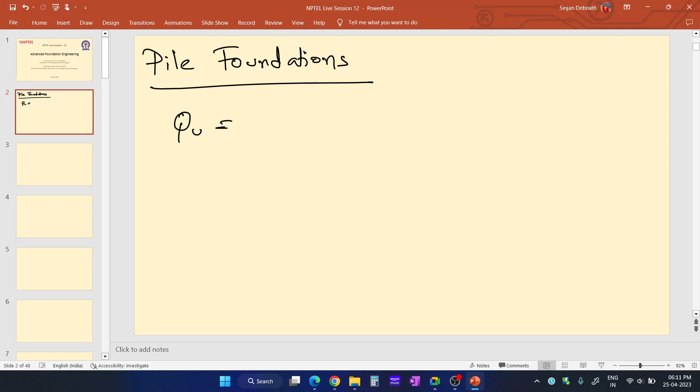So pile foundations, the ultimate bearing capacity of pile foundations, QU, is the ultimate load carrying capacity of a pile foundation. It has two parts: one is tip resistance, and another one is frictional resistance. So QU is the total tip resistance, QP, plus QF. QP is the total tip resistance or end bearing resistance.

And this one is the total frictional resistance. So actually what happens is that a pile foundation derives its load carrying capacity from these two parts.

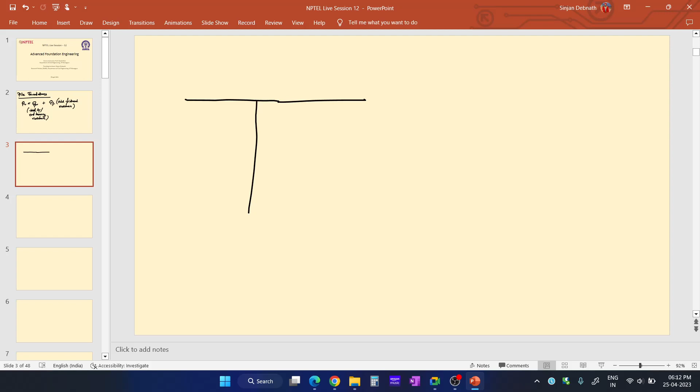So actually it is like this: suppose this is your ground surface, and you have constructed a pile foundation over here, and suppose you have a firm strata over here. Suppose this is your not so dense soil, weak soil, and here it is firm soil.

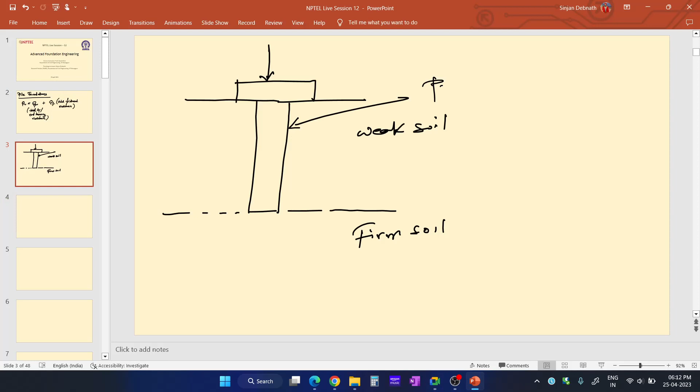Suppose here is the pile cap on top of the pile, and you are applying load on top of the pile cap, carrying superstructural load. So suppose this is the pile, this is the pile cap, and the superstructural load is acting on top of it. How will it distribute the load? First, there will be skin friction along the length of the pile, and also end bearing resistance, exactly as I mentioned earlier.

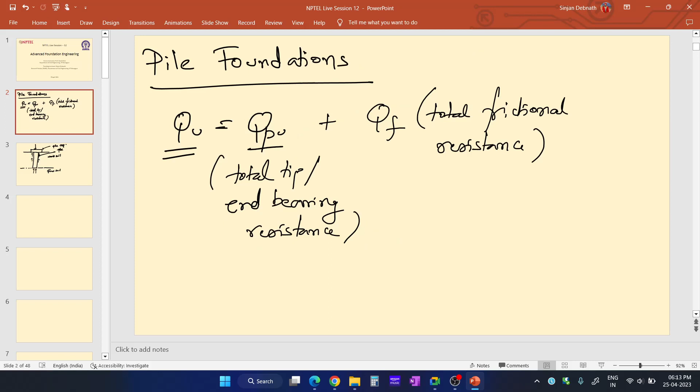The ultimate load carrying capacity of a pile has two parts: total tip resistance and frictional resistance. Suppose you apply load Q, and the load is carried in two parts: one is frictional resistance, QF, which acts along the length of the pile. The other is end bearing resistance, QPU, which is provided by the firm soil below the weak soil.

Now suppose this firm soil is at a greater depth, and the superstructural load Q is only carried by the QF part, the frictional part—meaning only QF dominates. Since the firm strata is at a very large depth, constructing a very long pile would be uneconomical. Instead, if we construct a pile of substantial length, it will provide enough skin friction to carry the total structural load. When QF is the dominant one, this type of pile is known as a frictional pile or floating pile.

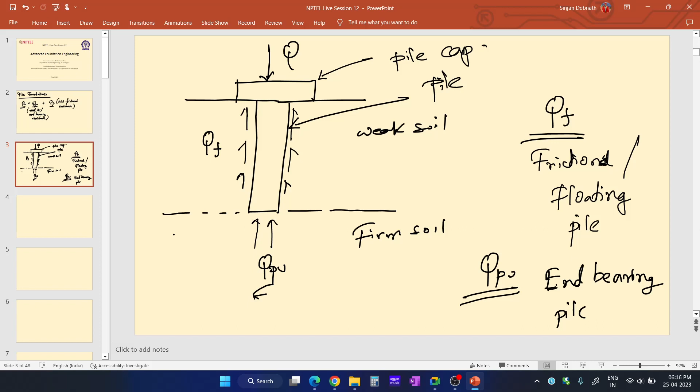Now let me write down the equations we will use. The ultimate load carrying capacity of a pile is defined by two parts: first, QPU, the total tip resistance, and second, the total skin friction resistance, QF. These can be written as QPU = qpu × AB and QF = fs × AS.

So QPU is the unit tip resistance, or unit end bearing resistance.

This capital QPU is equal to small qpu into AB, where AB is the cross sectional area of the base of the pile, particularly important when the pile is tapered—where the top diameter and base diameter differ. In such cases we take the area of cross section of the base. Otherwise, if the diameter is uniform throughout the length of the pile, we can take the cross sectional area at any depth.

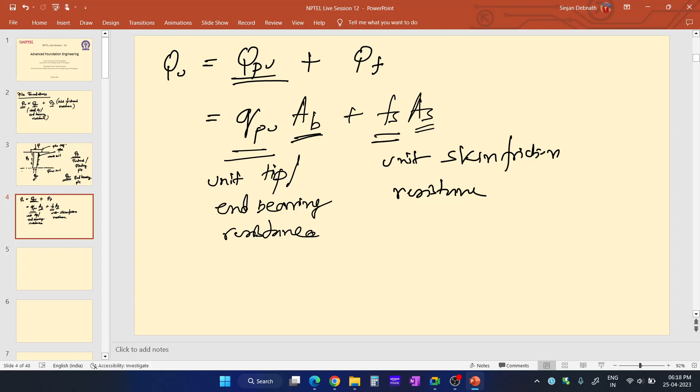Now, one thing I would like to mention before going into the equations. We know the ultimate bearing capacity for shallow foundation, the Terzaghi equation. Let me write it down once again.

See, this one is tip resistance. Look at this portion, it will provide the base of the pile. The tip of the pile is resting on top of the firm soil, and it is providing end bearing resistance. It is more or less similar to that of shallow foundations.

So what is the basic bearing capacity equation for shallow foundation? QPU for shallow foundation is C*NC plus sigma dash*NQ plus 0.5*gamma*B*N gamma. This is the ultimate bearing capacity equation for shallow foundation.

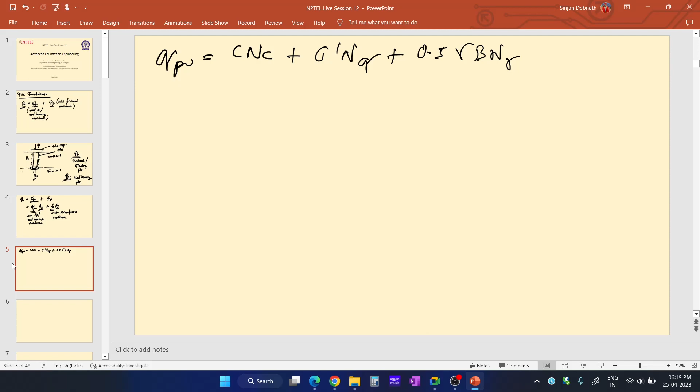So these two parts are much greater than this part, so this part can be easily ignored. So QPU can be written like this: C*NC plus sigma dash*NQ.

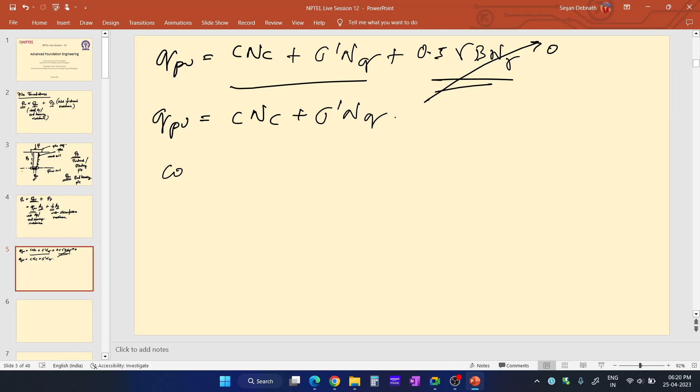Now if the soil is cohesive soil, if you remember the previous lectures, in case of cohesive soil this part becomes zero because N gamma is zero. Only this part remains. So that means for cohesive soil, QPU is C*NC.

And in case of cohesionless soil, this C becomes zero, only this part remains. So in that case, for cohesionless soil, we can write QPU is equal to sigma dash*NQ.

What is sigma dash? This sigma dash is the effective overburden pressure. And what is C? C is the cohesion. NC and NQ are the bearing capacity factors. So these are the two equations. And also I'd like to mention one thing, these two are QP.

And what about FS? So we have determined this QPU for cohesive soil and cohesionless soil. And one thing also to mention, for cohesive soil this C, this NC is taken as 9, the bearing capacity factor. It is generally 9*CP.

It is denoted, this C is denoted as CP, and the cohesion part, and NC is equal to 9.

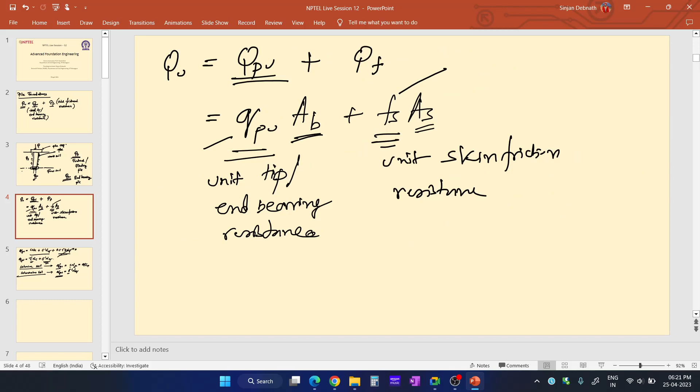So FS, for cohesive soil, this FS is equal to alpha into C dash. What is alpha? Alpha is the adhesion factor. And what is C dash? C dash is the cohesion along the length of the pile.

Suppose you have a pile like this, and this is your firm strata. In that case, C dash is the cohesion of this soil layer, and Cp is the cohesion of this part of the firm strata, along the length of the pile.

So for cohesive soil, this Fs, that is the unit skin friction resistance, it is alpha into C dash, where alpha is the adhesion factor and C dash is the cohesion of this layer along the length of the pile. Now, for cohesionless soil,

this Fs becomes K into sigma AV dash tan of delta. So what is K? K is the lateral earth pressure coefficient. And what is sigma dash AV? It is the average effective overburden pressure. And tan delta, what is delta? Delta is the wall friction between the pile material and the soil.

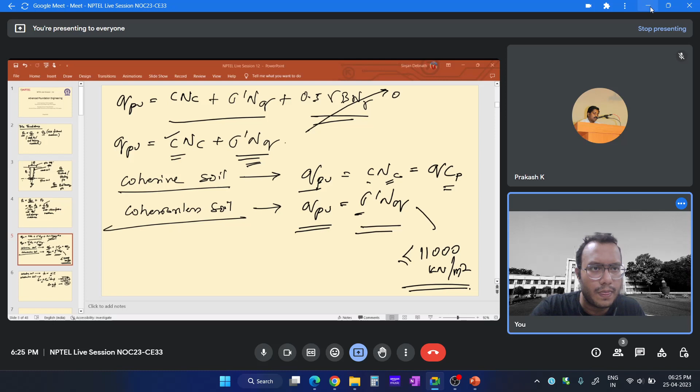I hope you have all understood these things, these are all basic things. So now I'm going to proceed to the problems.

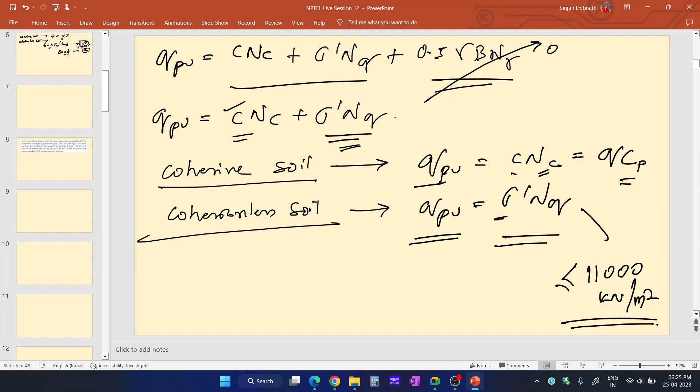Let's go to the first problem. Let me read out the problem once: a 15-meter long, 300 diameter pile is driven in a uniform deposit of sand. Phi is equal to 40 degree.

The water table is at a depth of 2 meter below the ground level. The unit weight of sand above and below the water table is 18 and 20 kilonewton per meter cube respectively. Using k equal to 2 and delta equal to 3/4 of phi, NQ is given as 135. Find out the ultimate load carrying capacity of the pile considering the critical depth concept. Take LC equal to 20D for dense sand.

So what is critical depth? Till critical depth, it is considered while calculating the ultimate skin friction resistance, the total skin friction resistance. It is considered that the overburden pressure, used to calculate the skin friction, increases linearly up to the critical depth, suppose up to 20D from the ground surface. But beyond that it remains constant. You will understand it once again as I solve this problem.

I have already explained these things in previous sessions, but let me say it once again. It is mentioned that LC is equal to 20D, that is the critical depth. So from the ground surface up to 20D depth, the overburden pressure will increase linearly. After that it will remain constant. This is only required for calculating the skin friction resistance. You'll understand as I solve this problem.

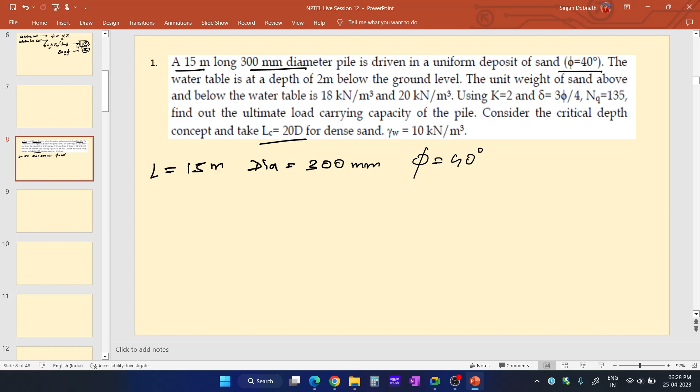Let me write down all the information given. The length of the pile is 15 meter, and the diameter of the pile is 300 millimeter. It is driven in a uniform deposit of sand, phi is equal to 40 degree. The water table is at a depth of 2 meter below the ground level. Suppose this is the ground level and this is the pile, like a vertical pipe, 15 meters long.

The diameter is 300 millimeter, and phi is 40 degree. The water table is at a depth of 2 meter below the ground level. The unit weight of sand above and below the groundwater table is 18 and 20. So here gamma is 18 kilonewton per meter cube above, and below the water table gamma sat is 20 kilonewton per meter cube.

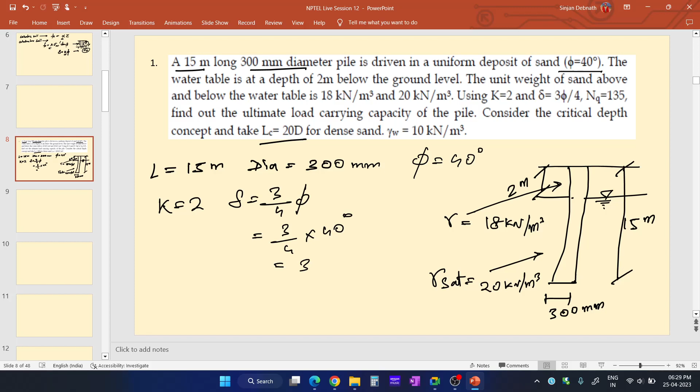K is equal to 2, that is the earth pressure coefficient, and delta is equal to 3/4 of phi, so 3/4 of 40 degree, that means 30 degrees. NQ is given as 135. LC is given as 20D, so 20 into 0.3, which comes out to be 6 meter.

Okay, so this is all the things that are given over here. And gamma W, that is the unit weight of water, is 10 kilonewton per meter cube. Okay, let me draw this once again over here.

This is the pile. The length of the pile is 15 meter. This is the ground surface, and at 2 meter depth there is a water table. LC is how much? LC is 6 meter.

So that means this is the critical depth. Suppose this is the critical depth LC. So up to this point, this overburden pressure will increase linearly, like this. Here it is 0 obviously, and here over here it is gamma into Z.

Actually 6, so that means this part is below the water table, the 4 meter. So up to here it will increase linearly, and below from this up to here it will increase linearly, and from here also below the water table it will increase linearly. Okay, after that throughout the depth it will remain constant, like this.

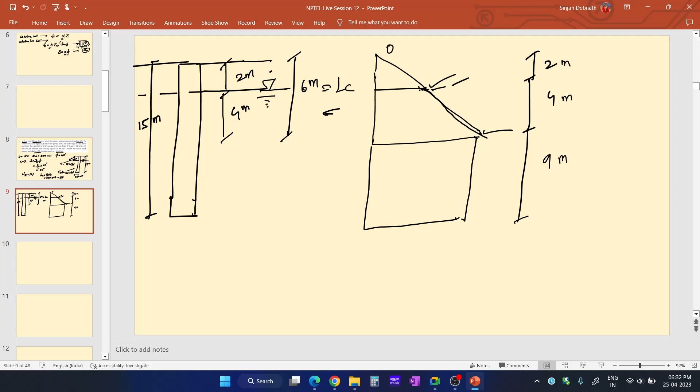So at this point, how much? This unit weight is 18 kilonewton per meter cube, and below the water table gamma sat is how much? It is 20 kilonewton per meter cube. Okay, it is 18 and 20.

So over here the unit weight is 18 into 2, that is 36 kilonewton per meter square. Because 18 into 2, this is 2, so 18 into that.

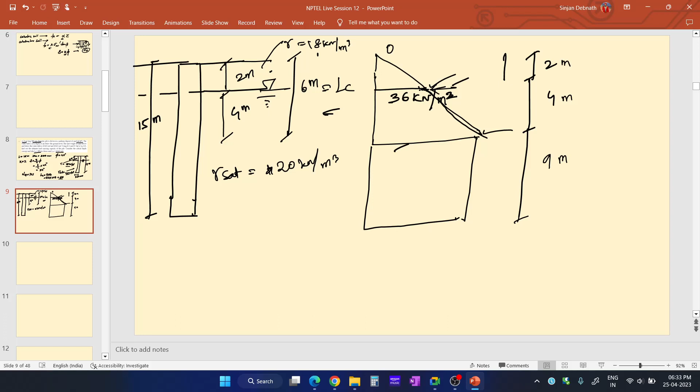And over here, what will be the overburden pressure at this depth, that is at 4 plus 2, 6 meter below the ground surface? So it will be this 36 plus. This portion is submerged, this portion is above the groundwater table, and this portion is submerged. So for the portion above the water level, that is for the 2 meter portion, it is 36.

So 36 plus, for this portion it will be gamma sat minus gamma w, that is the submerged, into 4 meter. So that means this saturated is how much? It is 20. So 20 minus gamma w, which is 10, into this 4 meter depth, it comes out to be 76 kilonewton per meter square.

And it is constant throughout the rest of the depth. So here it is 76 kilonewton per meter square, the effective overburden pressure. So we have determined the effective overburden pressures at various depths.

So now let us go back to the question. We need to find the ultimate load carrying capacity of the pile. So now, after determining all the effective overburden pressures at various depths, we need to find out the frictional resistance part, that is the skin friction part.

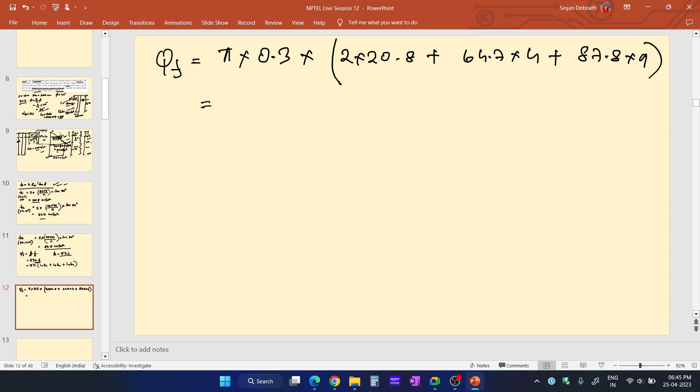What is the third portion? Length of the third portion is 9 meter. What is Fs3? Fs3 is 87.8. So that means it will be 87.8 into 9. Now if you calculate this, you will get the value of QF, and QF comes out to be 1028 kilonewton.

Now for the total ultimate end bearing resistance, QB. We have calculated the first portion of the ultimate load carrying capacity, the total skin friction resistance, it is 1028 kilonewton. Now we'll calculate the ultimate end bearing resistance, QB. QB is AB into QPU.

AB, we know it is the cross-sectional area of the pile. Here it is a circular pile. And what is QPU? QPU is sigma dash into NQ for cohesionless soil. So AB is pi by 4 into D square. The D is how much? It is 300 millimeter, that is 0.3 square.

Into this QPU, QPU is sigma dash into NQ. So what is sigma dash? Here also we will use this concept, the critical depth concept, because in the question it is already mentioned to use the critical depth concept. So for end bearing resistance also, while calculating it, we will use this critical depth concept. So what is the effective overburden pressure at this depth?

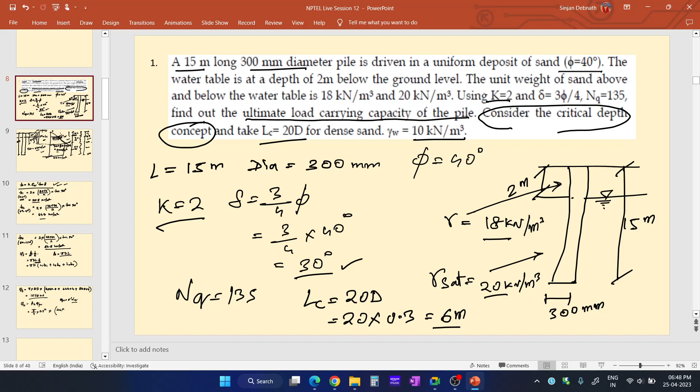It is 76. So QPU, how much? QPU is sigma dash into NQ. Sigma dash is 76. And NQ, what is NQ? The bearing capacity factor, given in the question, I believe it is 135. So sigma into 135. Now if you calculate this, you will get the value of QB, the ultimate end bearing resistance, and QB comes out to be around 725 kilonewton.

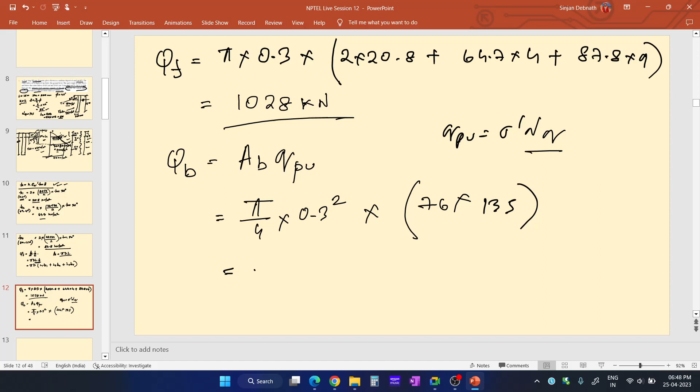One more thing: this value of QPU, the small qpu, should always be less than 11,000 kilonewton per meter square. This portion comes out to be around 10,260 kilonewton per meter square, so it is okay, much lesser than 11,000 kilonewton per meter square.

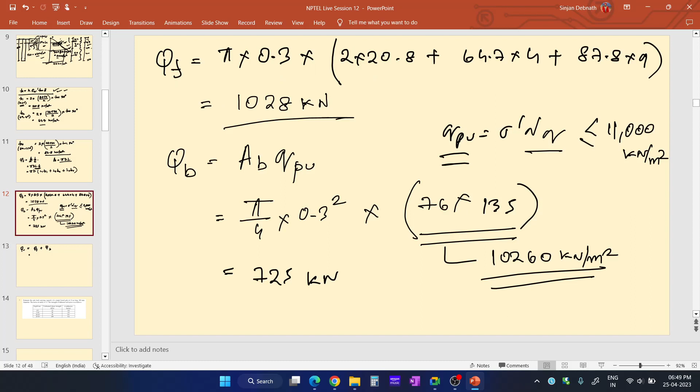So after calculating QF and QB, QF is 1028 kilonewton and QB is 725 kilonewton. The ultimate load carrying capacity is the summation of both parts, QF and QB. Adding 1028 and 725 gives the ultimate load carrying capacity of the pile, which comes out to be 1753 kilonewton.

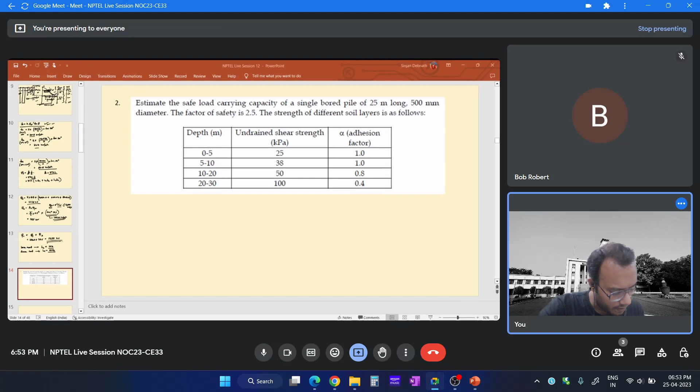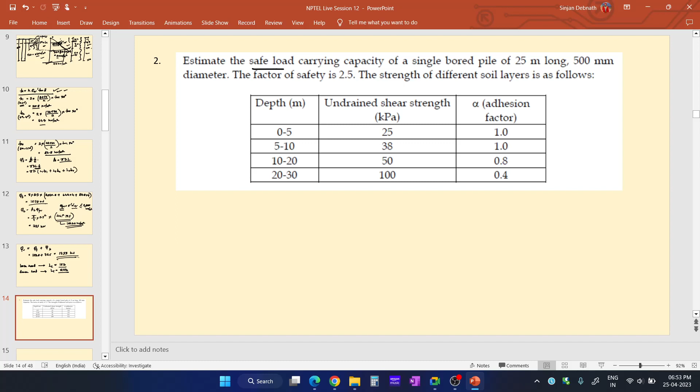The next question: estimate the safe load carrying capacity of a single bored pile, 25 meters long, with diameter 0.5 meter, factor of safety 2.5, and the strength of different soil layers is as follows. The length of the pile is 25 meters, and up to 30 meters depth below ground surface, the undrained shear strength, that is undrained cohesion Cu, is given along with adhesion factors. You need to estimate the safe load carrying capacity of a single bored pile.

Let's get started. First we need to determine the ultimate load carrying capacity of the pile, QU. After determining QU, we can divide that by the factor of safety to determine the safe load carrying capacity. So first we determine QU, and after that apply the factor of safety.

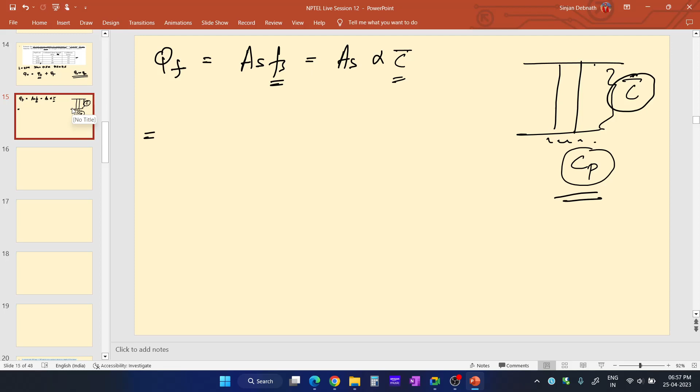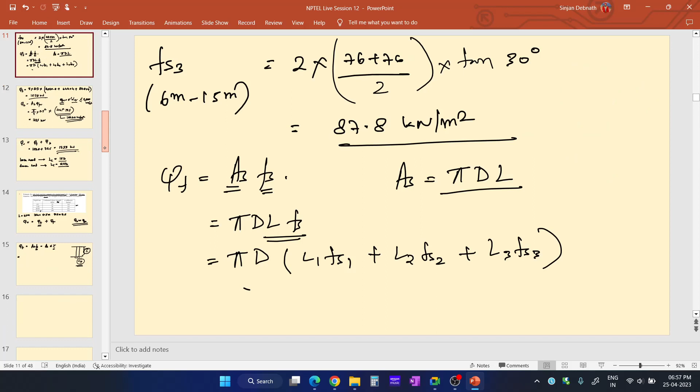So QF is AS into alpha into C dash. Now we can also break it like we did in the previous question. We can break it like this. So how we will break it? Like we did in the previous problem, we'll use this concept over here also.

So the length of the pile is 25 meter, and up to 30 meter the data are given. So let me draw the pile over here once. Suppose this is your pile, the length of the pile is 25 meter, and what are the segments?

So the first segment is 0 to 5 meter, so 5 meter is the length of this segment. The next segment is 5 to 10, so that means the length of this segment is also 5 meter, and the third segment is from 10 meter to 20 meter.

So this segment is 10 meter in length, and the length of the pile is 25 meter, so that means up to this portion we will consider, up to 25 meter. So this segment is 5 meter in length. Up to 30 meter data is given, and we'll use this data for this last segment.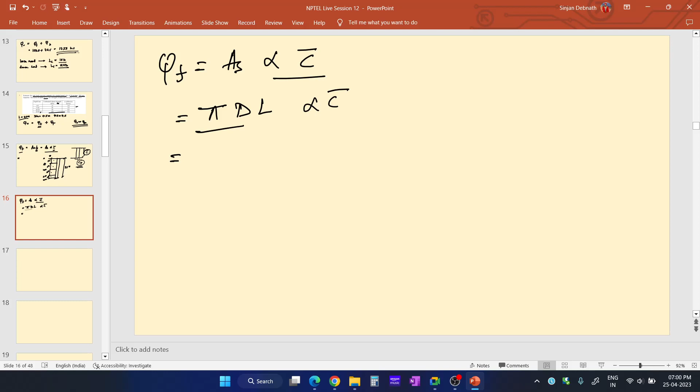So QF is equal to AS into alpha into C dash. Can we write it like this? So AS is pi into D into L, that is the surface area of the pile, and this one is alpha into C dash. So pi into D is constant, so can we write it like this?

L1 is the length of the first segment, alpha 1 is the adhesion factor of the first segment, and C1 is the undrained cohesion of the first segment. And there are 4 segments, so we can write it like this: plus L4 alpha 4 C4.

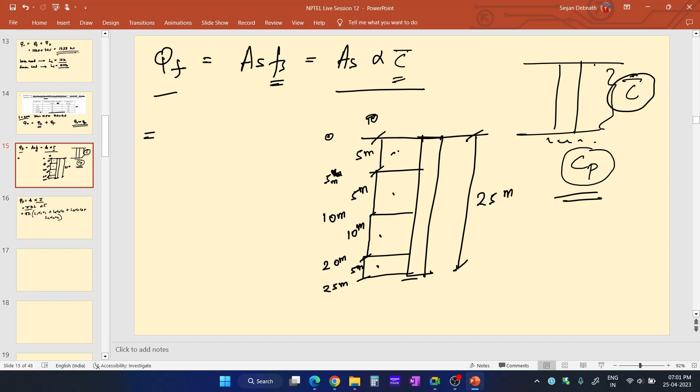These are the lengths L1, L2, L3, L4: 5 meter, 5 meter, 10 meter, 5 meter. Alpha 1, alpha 2, alpha 3, alpha 4 are the adhesion factors, and C1, C2, C3, and C4 are the cohesions. Everything is given, so now let me incorporate.

So let me just put all the values into this equation. Pi into, what is the diameter of the pile? Diameter is 0.5. So pi into 0.5 into L1 alpha 1 C1. The length of the first segment is 5 meter. What is alpha 1? Alpha 1 is 1 and C is 25.

So 1 into 25, plus L2. L2 is 5 meter, alpha 2 is 1, and Cu is 38. So it is 5 into 1 into 38 plus L3. L3 is 10 meter, the length of the third segment, adhesion factor is 0.8, and Cu is 50. So here it is 10 into 0.8 into 50, the cohesion value.

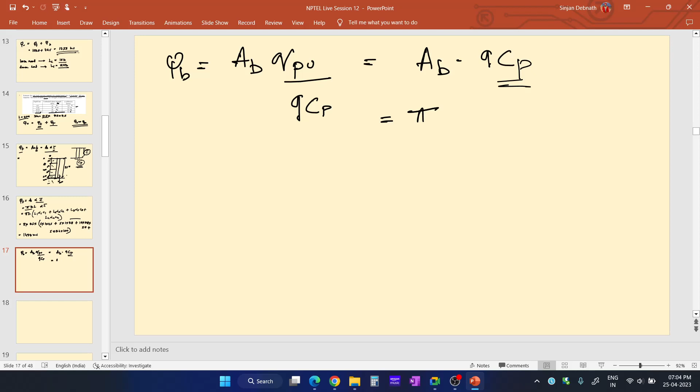So AB is the cross sectional area of the pile, that is pi by 4 into d square. What is the diameter of the pile? Diameter of the pile is 500 millimeter, that is 0.5 meter. So 0.5 square into 9 Cp. 9 into Cp is 100. Now if you calculate this, you get the value of QB, the total end bearing resistance.

It comes out to be around 177 kilonewton. So now you have both the parts, the ultimate skin friction resistance and ultimate end bearing resistance, and you need to add up both terms to get the total load carrying capacity, the ultimate load carrying capacity of the pile. So QU is equal to QB plus QF. QB is 177, and QF we have already determined, it is 1437.

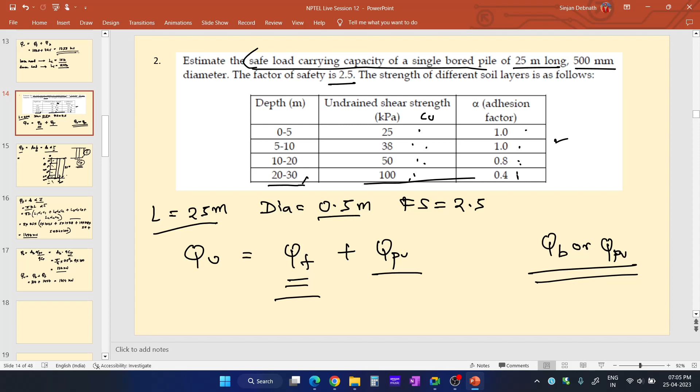So if you add both the terms, it comes out to be around 1614 kilonewton. In this question we have been asked to determine the safe load carrying capacity, and the factor of safety is given as 2.5. So Q safe, we need to apply factor of safety on this value 1614, the ultimate load carrying capacity of the pile. So QSF is equal to QU by FS. QU is 1614, and the factor of safety is 2.5, and it comes out to be around 645.6 kilonewton. This is the safe load carrying capacity of the pile.

So let me know if you have any doubt. Please go through this problem once, and let me know if you have any doubt in this particular question. I'm giving you a couple of minutes, please go through this problem.

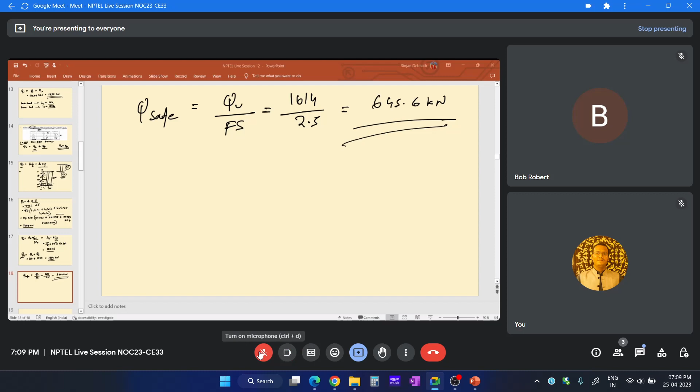So I believe you have no doubts. So let me proceed to the next problem. This is the third problem.

A square concrete pile, 305 millimeter by 305 millimeter in cross section, is driven to a depth of 20 meter below the ground surface in a saturated clay soil. A summary of the variation of frictional resistance Fc obtained from cone penetration test is as follows. So we have cone penetration test data, and we need to estimate the frictional resistance for the pile.

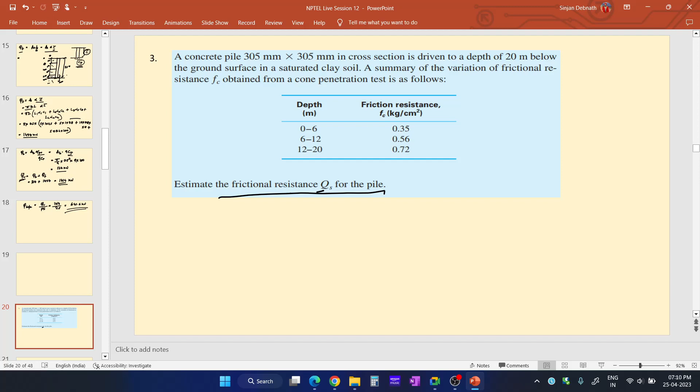So we have been asked to estimate only the QF part, or QS. QF can also be represented by QS. So we need to estimate the frictional resistance part. Here the cone penetration test data is given, CPT. From CPT test we get this frictional resistance, Fc. Now remember one thing.

Remember one thing: what is QF or QS? It is a saturated clay soil. So what is QF or QS? It is ASFS, right? AS into FS. Now this FS, what is FS? FS is the unit skin friction resistance.

So what is Fs? We generally write it like this. For clay, it is alpha into C dash, right? Alpha is the adhesion factor and C dash is the cohesion part, as I have explained earlier. C dash is the cohesion of this soil portion along the length of the pile.

So this one is Fs, and for CPT data, this Fs becomes alpha dash, an adhesion factor, multiplied by FC, that is this term. So before going into these terms, let me explain what are these adhesion factors actually, alpha and alpha dash.

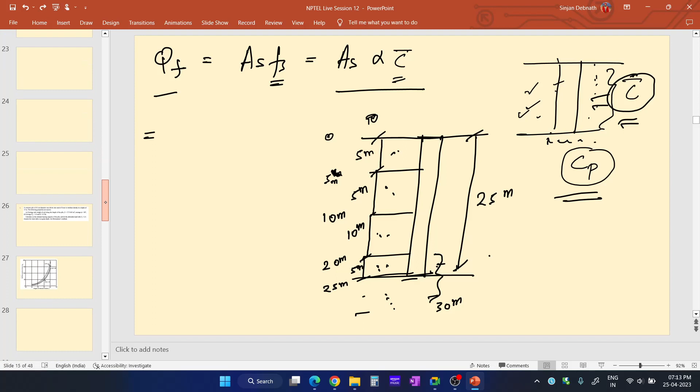So now let me get back to the problem. It is alpha dash into FC. So Fs is equal to alpha dash into Fc, that is unit skin friction resistance, where Fc is the frictional resistance that we get from CPT test data, and these are in kg per centimeter square.

So let me just transform this into kilonewton per meter square. Let me write down all this data: 0 to 6 meter it is 0.35, 6 to 12 it is 0.56, from 12 to 20 it is 0.72, all in kg per centimeter square.

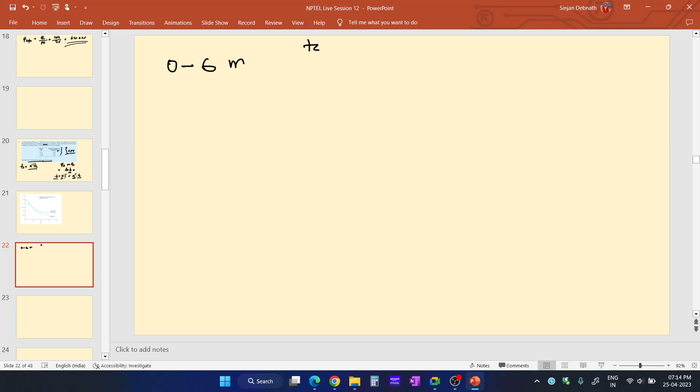So for 0 to 6 meter depth, the FC is 34.34, all these are in kilonewton per meter square. From 6 to 12 meter, it is 54.94 kilonewton per meter square, and for 12 to 20 meter, it is 70.63 kilonewton per meter square.

And now we need to determine this alpha dash. How will we determine it? We will use this curve, this curve for concrete and timber piles, because we are assuming that it is a concrete pile, as it is mentioned that it is a concrete pile. So we will use this curve for concrete and timber piles.

So we need to determine FC and PA, that is FC by PA. We know the value of FC, these are the values after converting into kilonewton per meter square. And what is PA? PA is a reference pressure, we generally take it as atmospheric pressure or 100 kPa, that is 100 kilonewton per meter square. Here PA is 100 kilonewton per meter square, it is the reference pressure. So FC by PA.

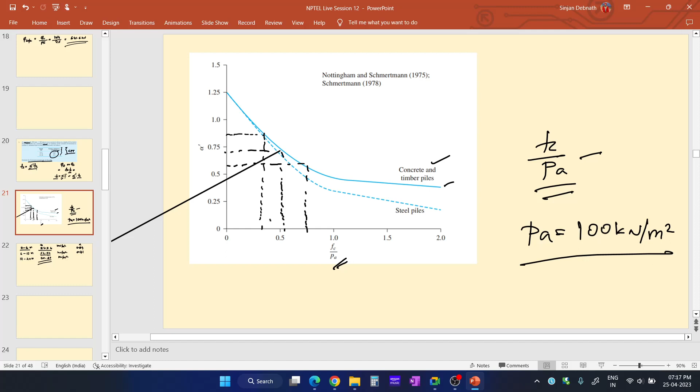Now for the third segment, the FC value is 70.63 and PA is 100, so FC by PA becomes 0.7. So 0.7 is somewhere over here. If we project this line like this and project that point over here, we will get the value alpha dash, which is around 0.63. So we have the values FC and alpha.

So we know the value of FC and alpha dash. From this curve we get the value of alpha dash. So we know the FC for three different segments: 0 to 6, 6 to 12, and 12 to 20. We also know the value of alpha dash, the correction factor, for these three segments, and pile length is 20 meters. So we know FC and alpha dash for all the segments.

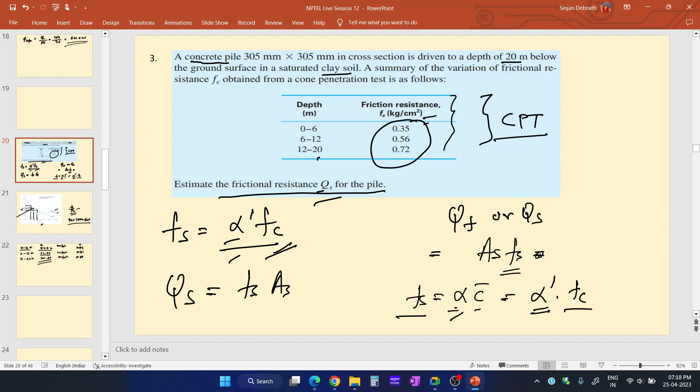Now we need to calculate the frictional resistance, that is QS. QS is Fs into AS. AS is the surface area of the pile, which is pi into D into L. So QS is equal to Fs into AS. We need to break this up like the previous problems, so AS is pi into D into L, and Fs.

There are three segments: 0 to 6, 6 to 12, 12 to 20. 0 to 6 is 6 meters, 6 to 12 is also 6 meter length, and 12 to 20 is 8 meters. These are the L values of the segments. So we can write it like this.

Wait a minute, please.

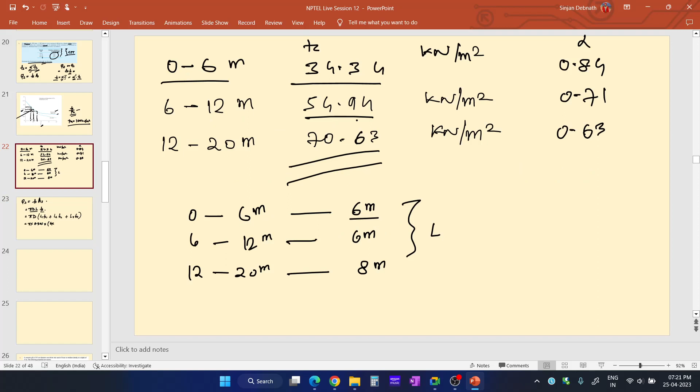So pi into d, the diameter of the pile, is 305 millimeter, that means 0.305 meter. L1, the length of the first segment, is 6 meter, so 6 into fs1. Fs1 is alpha dash into fc. So 6 into fs1, where fs1 is alpha dash into fc1: 0.84 into 34.34.

For the second part, L2 is 6 meter, into alpha dash 2 into fc2. Fc2 is 54.94 into 0.71, plus the third term. The length of the third segment is 8 meter, so 8 into alpha 3 into fc3. Alpha 3 is 0.63, and fc3 is 70.63.

So if you calculate this, you will get the value of total skin friction resistance, QF, the total skin friction resistance. So QF comes out to be around...

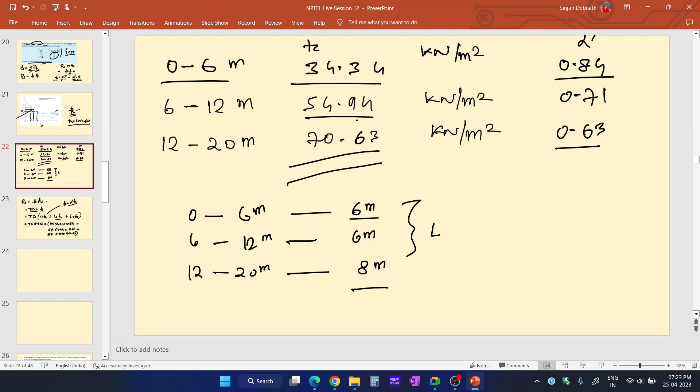This is a square pile, sorry, not a circular pile. So here, FS into AS, what is the surface area of a square pile? Surface area of a square pile AS is generally taken as perimeter into length. Perimeter is 4a, where a is the side of the square, into the total length of the pile. So we will not use pi into d; in place of pi d, we will use 4 into the side, suppose b.

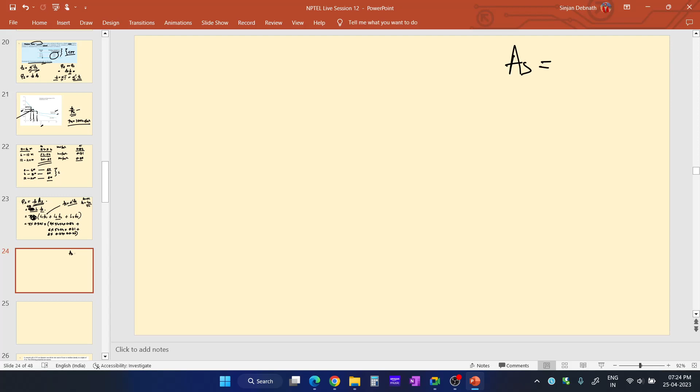Let me write it down clearly. The surface area of a square pile is generally the perimeter of the pile into the length of the pile. The perimeter is 4 into b, where b is the dimension, the length of a side of a square, into length. So 4 into b into l, suppose.

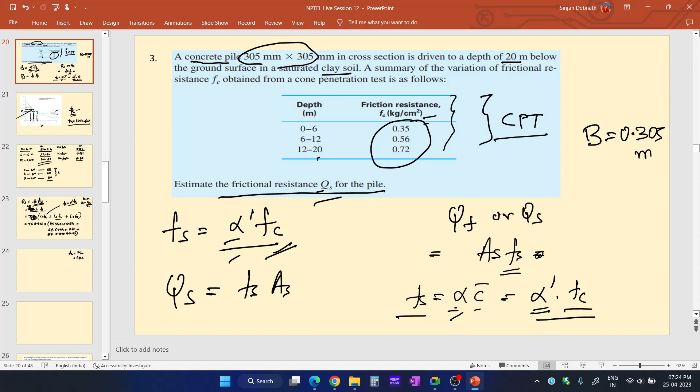So b is how much? Suppose it is 0.305 meter. So it is 4 into b into l. So 4 into b into l into fs, and we can break it like this. So here it will be 4 into b. In place of pi, there will be 4. So 4 into b into this. Now if you calculate this, you will get the value of qf, that is the total skin friction resistance. It will come out to be around 931 kilonewton.

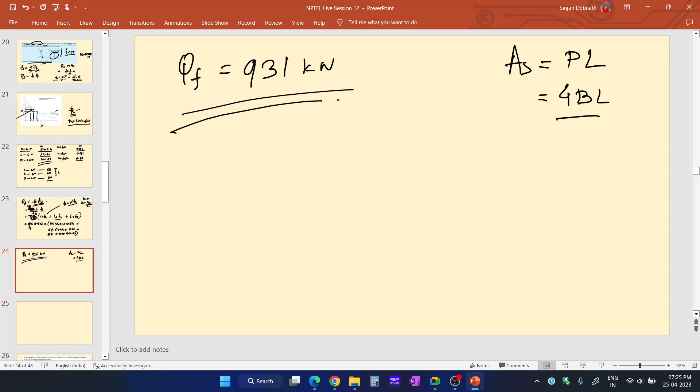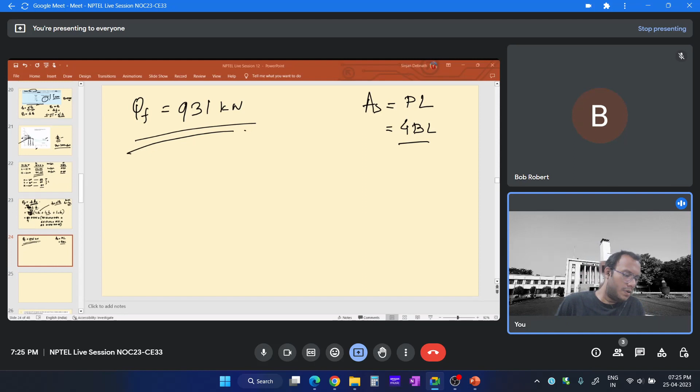Please let me know if you understood the concept or not. Please go through this problem once, for a couple of minutes, and let me know if you understood the problem or not.

Yes, don't worry. This alpha dash, the value of alpha dash will be given, or the graph will be given, in the examination. Not to worry about that.

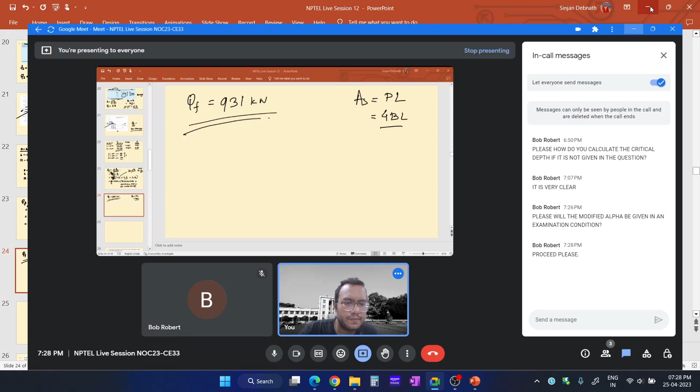So let me read out the problem once. A concrete pile of 45 centimeter diameter, that is 0.45 meter, was driven into sand of loose to medium density to a depth of 15 meter. So depth of the pile is 15 meter.

The following properties are known. The average unit weight of soil along the length of the pile, gamma, is 17.5 kilonewton per meter cube. Average phi is 30 degrees. Average Ks is 1 and delta is 0.75 of phi. Calculate the ultimate bearing capacity of the pile and the allowable load with factor of safety 2.5. Assume the water table is at a great depth. Use Berezantsev's method.

So we have been asked to calculate the ultimate bearing capacity of the pile, and after that we need to calculate the safe load or the allowable load by applying factor of safety. Water table is at a great depth.

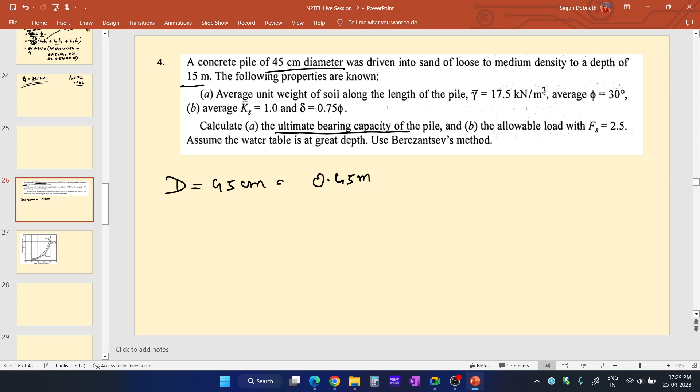So for determining this ultimate bearing capacity of the pile, QU, we need to determine the skin friction resistance and the total end bearing resistance, that is QPU and QF. So we'll determine these two terms and sum it up. First of all, we'll determine this part.

So let us proceed. What is phi? Phi is 30 degrees. So let me just break this into parts.

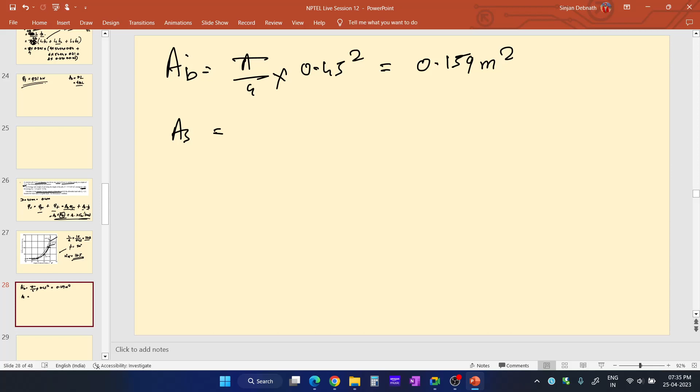And what is the surface area of the pile? AS is pi into d into L. So pi into 0.45 into length of the pile, which is 15 meter. So it comes out to be around 21.195 meter square.

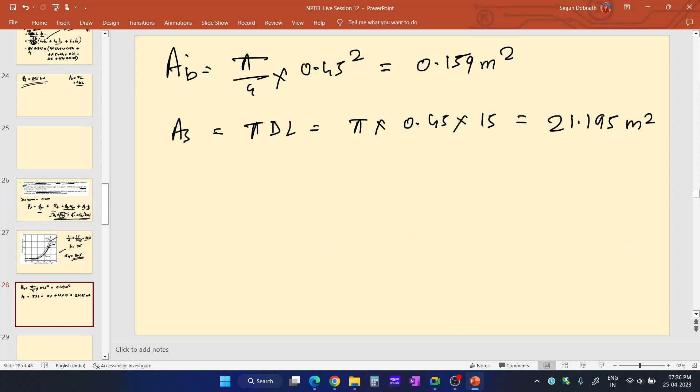So now we have determined this term and this term. So we need to determine sigma dash and sigma AV dash. Sigma dash at 15 meter depth, since water table is at a great depth, there is no need to consider any submerged unit, just gamma into L. Gamma is 17.5, so 17.5 into 15 meters.

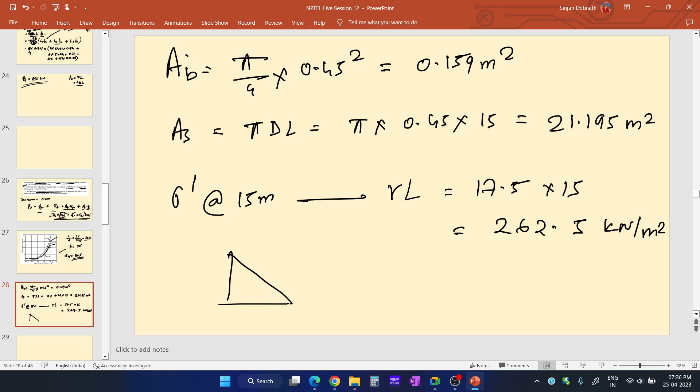It comes out to be around 262.5 kilonewton per meter square. Actually the effective overburden pressure increases like this, gamma into L from 0 to 15 meter, linearly increasing. Sigma AV dash at 15 meter equals sigma at 15 meter, which is 262.5, and it is 0 at 0 depth, at the ground surface. So the average is 0 plus 262.5 by 2, which comes out to be around 131.25 kilonewton per meter square.

So now we have determined all the terms, sigma dash and sigma AV dash, and we know the value of K. Now tan delta, delta is 0.75 of phi. Phi is 30 degrees, so delta comes out to be around 22.5 degrees. So we can easily find tan delta.

So we have this, we have this, we also have this. So we know the value of all the parameters. We also know the value of NQ, sigma dash, and AB, the area of the base of the pile. We know everything. So now if we just put all the values of all the parameters into this equation, we will get the value of QU.

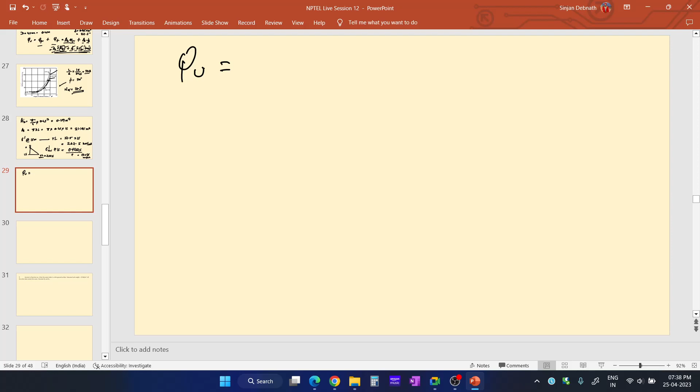After calculating, QU comes out to be around 1841 kilonewton. This is the answer. If you just put the values of all the parameters, which we have determined and some are given, into this equation, you will get the value of QU, which is 1841 kilonewton.

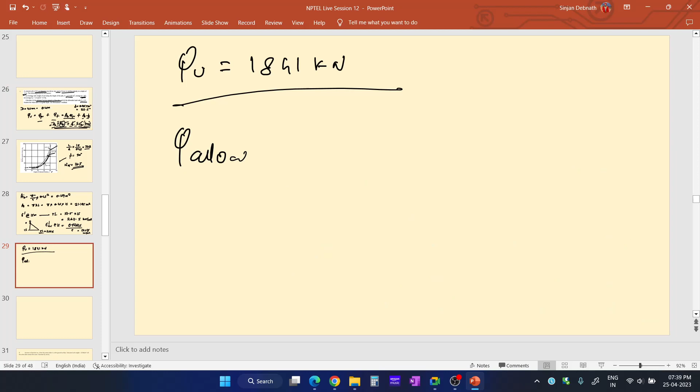Now we need to use this factor of safety to determine the allowable load. Q allowable, or the safe load, is QU by factor of safety. QU is 1841, factor of safety is 2.5. So it comes out to be around 736 kilonewton. This is the answer.

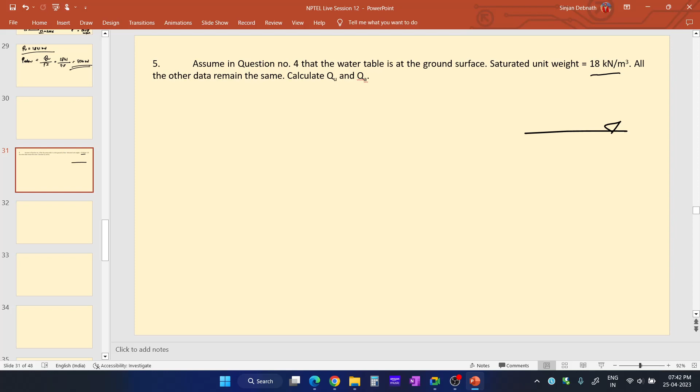In this particular question, the water table is at a great depth, and in this particular question, the water table is at the ground surface. So that means water table is over here. Here is a pile. The length is 15 meters, and the diameter is 45 centimeters. This is the problem.

So saturated unit weight is given, gamma sat, it is 18 kilonewton per meter cube. We need to calculate QU and Q allowable. So I need to calculate QU and Q allowable.

So QU is what? It is QF plus QPU or QB. So QU, the ultimate bearing capacity, can be represented by these two terms, QF and QPU, and this is sand. So QF can also be written as we did before.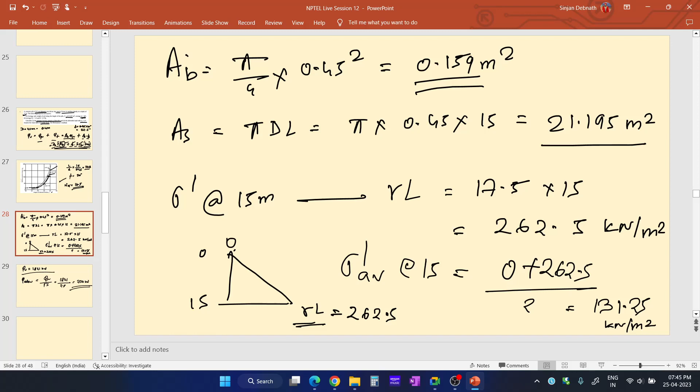What is AB? Since the diameter is same, we can use this AB also, the value of the cross-sectional area of the pile, which is 0.159 meters square. So AB is 0.159 meters square. So we have the values of these two parameters.

Well, we also know the value of K, it is similar to that of the previous question. K is 1. We also know the value of tan delta. We also know the value of NQ because NQ depends upon L by D and phi only. So NQ is 19.5.

And K, let me write it down over here. So K is 1 and tan delta is 22.5. Delta is 22.5 degrees and K is equal to 1.

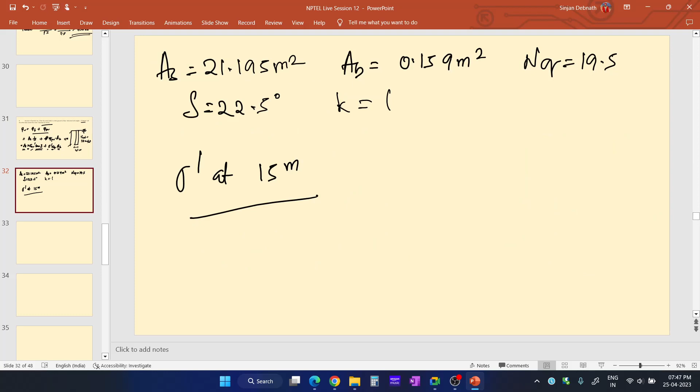So we just need to determine this sigma dash AV and sigma dash at 15 meter depth. So sigma dash at 15 meter depth, that is the effective overburden pressure at 15 meter depth. Since this is totally submerged, we need to use the submerged unit weight. So saturated unit weight is 18, and what will be the effective overburden pressure at 15 meter depth? It is totally submerged, so we can write it like this.

The saturated unit weight is 18. So we can write it like this: gamma sat minus gamma W into 15. So gamma sat is 18, gamma W is 9.81, and it is 15 meter length. And it is also increasing linearly, right? This sigma dash, the effective overburden pressure, increases linearly from the ground surface to 15 meter depth.

In both cases, it does not depend upon the water table. Actually, in the first case, the water table is at a great depth, and here the water table is at the ground surface. If the water table was somewhere in the middle, it would have been different. But since the water table is at the ground surface, sigma dash will increase linearly from 0 to 15 meter depth, that is from ground surface to 15 meter depth.

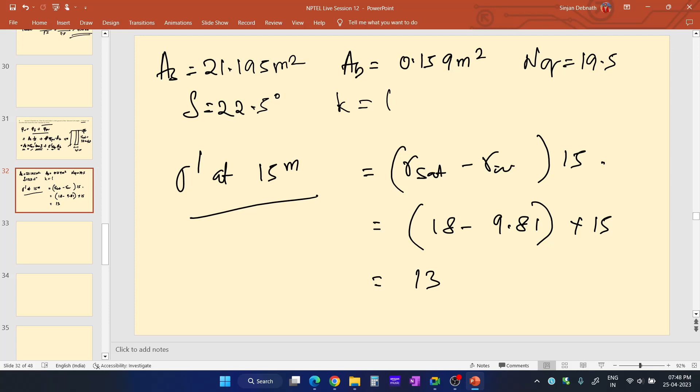So sigma dash at 15 meter depth is how much? It is around 130.35 kilonewton per meter square, if you calculate this. Since this is also increasing linearly, sigma dash average at 15 meter depth is 0 plus 130.35 divided by 2, and it comes out to be around 65.18 kilonewton per meter square.

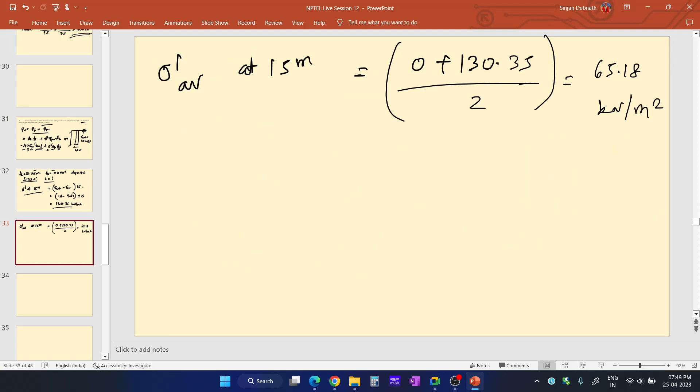So we have determined this sigma AV dash and sigma dash. Now we have the values of all the parameters. We know AS, AB, the surface area, the cross-sectional area of the pile, the value of K, that is the lateral earth pressure coefficient. We know the value of tan delta, the value of delta, you can easily apply tan. We know the value of sigma dash at 15 meter depth, and we also know the value of sigma AV dash. We know NQ. So we have everything.

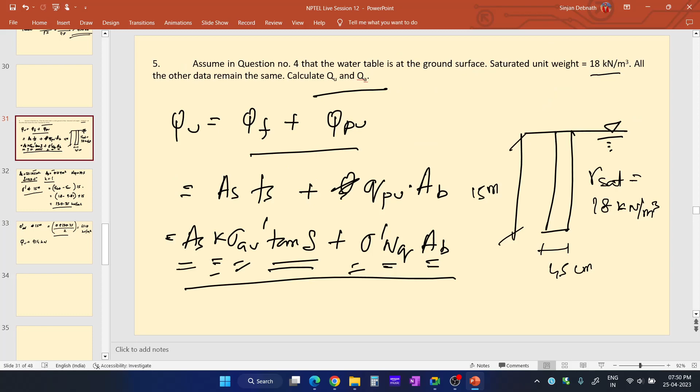You just need to put all the values into this equation. After calculating, you will get the value of QU, which comes out to be around 914 kilonewton. After applying the factor of safety, what is the factor of safety? It is 2.5, the factor of safety from the previous question, we need to use that. So Q allowable or Q safe is QU by factor of safety, so 914 by 2.5, it comes out to be around 366 kilonewton. So this is the answer.

One thing you must notice: in submerged condition, the ultimate bearing capacity is 914 kilonewton, and when the water table is at a great depth, it is 1841 kilonewton. So when the water table is at the ground surface, the ultimate load carrying capacity of the pile decreases by almost 50%. Here it is 914, and when the water table was at a great depth, the ultimate load carrying capacity was around 1841. It is almost double.

Here it is 914, and here it is 1841 in the dry case. Here the water table is at the ground surface, and in this particular case QU is 914. So it is almost half of that of the dry case. What I'm trying to say is that the ultimate bearing capacity of the pile becomes half when the water table is at the ground surface.